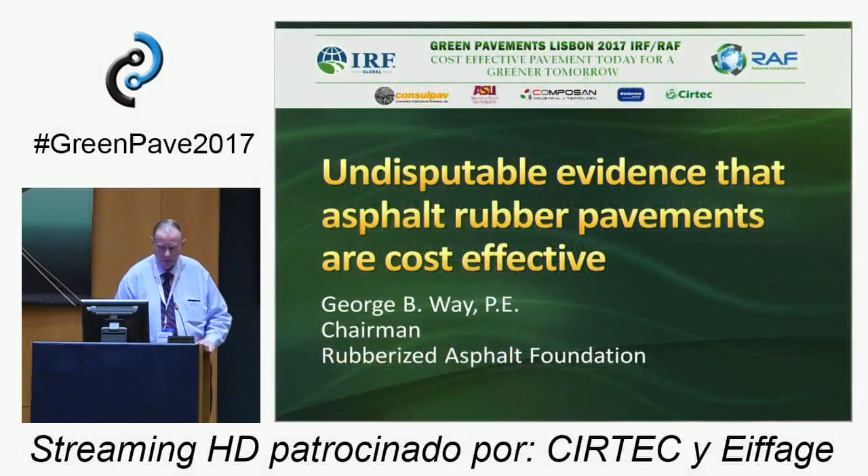This is the title that my good friend and partner George came up with. I'm not really too sure about 'undisputable' - I've actually never used that word in my entire life, but that's a good word, George. Sounds terrific, so quite a challenge in some ways.

Well, why do we even have paved roads? We talked about this a little bit earlier. Let's go back to basics here. We saw some roads before in one of the earlier slides.

Anyway, that's what we're trying to avoid with good roadways. And nowadays we've done such a good job. There was a movie that says, if you build it, they will come. I don't know if any of you ever saw it - it was about baseball. So we built it, and we built it all around the world, and the cars have come.

I've been to Riyadh, Saudi Arabia a few times the last few years. If you get outside of Riyadh, it really reminds you of Mars, actually - it looks a little bit like Mars, desolate. But in Riyadh, which is far from the coast, there's a lot of cars, and they're usually backed up like this. So one way or another, if you build a highway, build the buildings, the infrastructure, the cars will come.

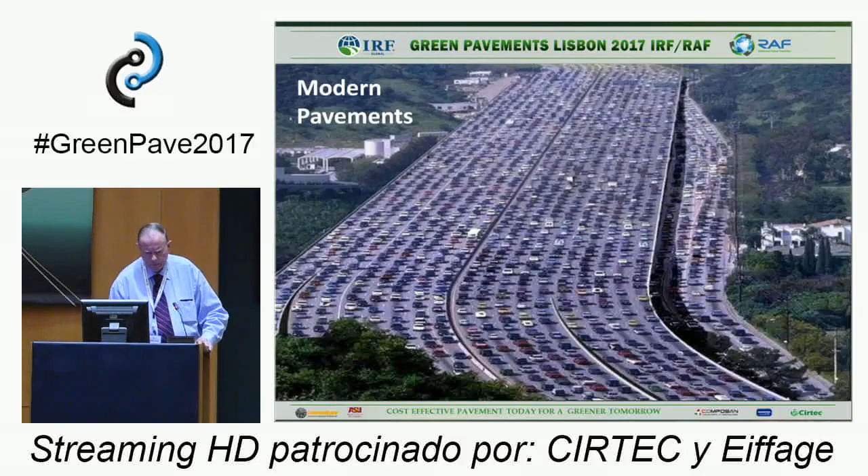And now, besides the problem we had before, which was getting out of the mud, now we also have the problem of maintaining and preserving our investment, which is a gigantic investment in roadways. So where does asphalt rubber or rubberized asphalt fit into this?

And you've already heard some wonderful presentations before me. I think Camille gave a fabulous presentation on this, and George, I think he does need psychiatric care, but we won't get into that at this point in time. We will talk about that later tonight when we've had a few more drinks, for that matter, and we'll discuss that.

But the thing about rubber and asphalt is it's turned out to be many things. I'm going to talk about these in general to kind of build a case for why it is such an undisputably great product. As George said, when it was first developed, it was patented and it was a very expensive product. All the patents are gone today, and it's reasonably inexpensive.

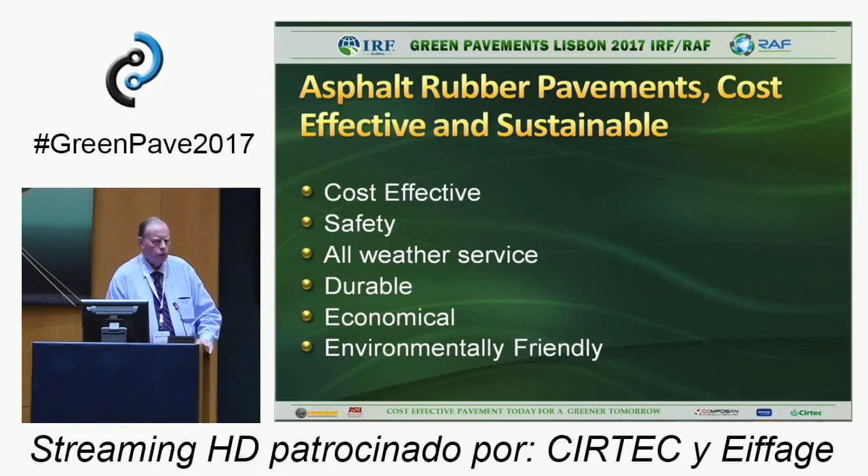It develops roadways that are safe. Of course we want safe roads, we want all-weather service - we want to make sure we're not driving through mud puddles or potholes. Durable, something that lasts for a long time. Economical, which is sort of like cost-effective, and environmentally friendly. Environmentally friendly is kind of a new thing - that's new in the sense that the man who invented it, going back years before, really didn't have that in mind at the time.

A tire is by itself a great thing. We've seen many presentations here about the future, what kind of highways are coming. As I envision the future, it seems like there still will be tires. People are still going to be driving on tires, whether in a solar car, one that runs on batteries, or whatever—it's still going to have rubber tires probably. There will be trucks and airplanes with rubber tires too. So there's still going to be used tires. They'll need to be recycled. We'll have to do something with them.

That won't change. So what about the recycled tire rubber itself? Well, it can do many things, and I've listed quite a few of them here, some of the good things. You've heard about these before. I'm not going to read each one, but you'll see some examples.

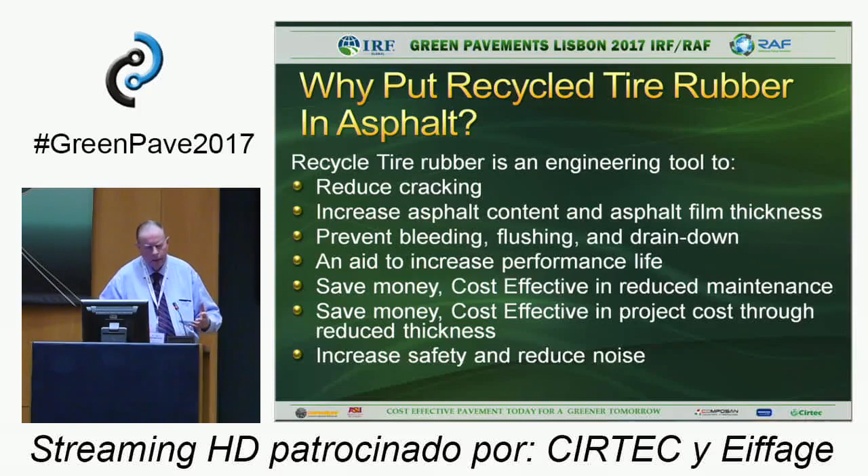Traditionally, asphalt rubber started out to be roughly 80% asphalt binder or bitumen and 20% recycled tire rubber. The first version actually didn't use crumb rubber, interestingly enough—they used rubber buffings off of a tire. Back in the days when they recapped tires, they peeled the rubber off, winding up with long shards. That's what they used in the beginning, so it was a little more difficult. Later on, they went to crumb rubber, and that's pretty much what everybody uses today. There are different ways of expressing it, whether by total weight or by weight of the binder, so you have to keep that in mind for the percentage, but it's up around 20% recycled tire rubber.

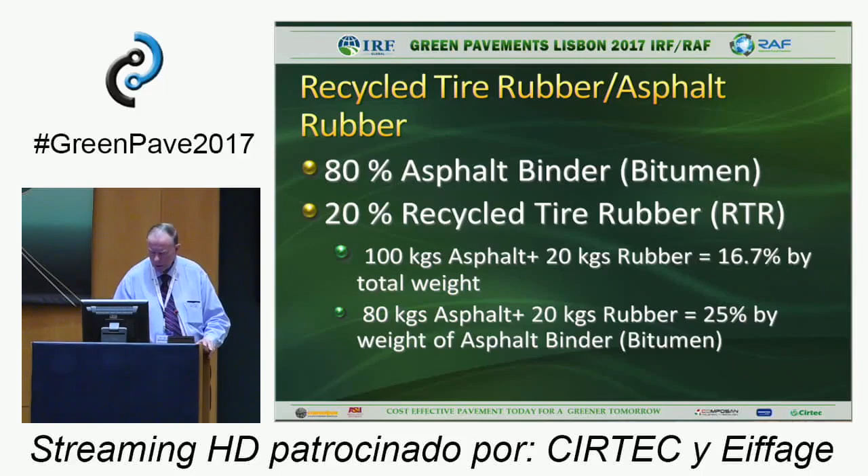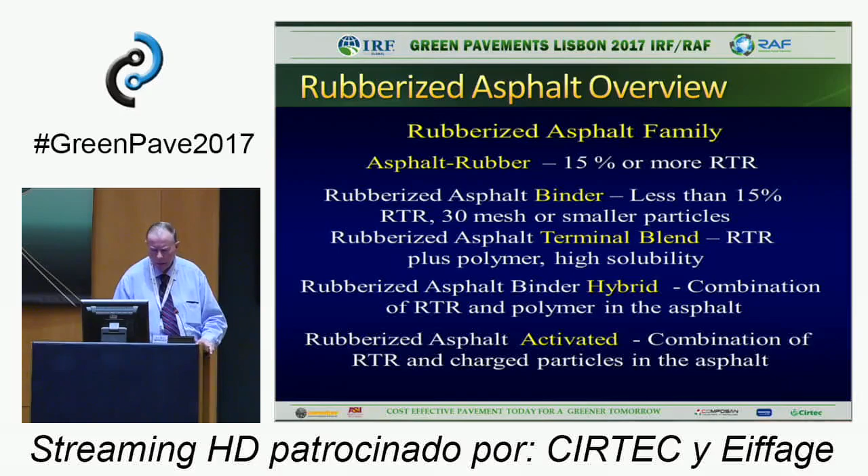Over the years that's changed. There's a lot of other products around today besides the 15% or more, which is the traditional asphalt rubber. You have amounts less than 15%, maybe 10 or 11, which work fairly well, with a smaller grind of rubber. You have it mixed with polymer, some small amount like SBS, which is kind of a hybrid. You have terminal blend, where the rubber is reduced and digested, and then polymer is added. And then you have activated rubber, which George spoke about—that's what we'll see a demonstration of this afternoon, right George? So you'll explain that in more detail later. Lots of different forms of application.

Just a few general remarks about integrating it into specifications. We heard that from our earlier speaker—he thinks it's one of the drawbacks, and that is somewhat of a drawback. Consider the fact that the AASHTO road test, which traditionally in the United States was the Bible for designing highways, didn't really have polymer or rubber, just neat asphalt. So how does that fit in there? Well, it didn't. It wasn't at the road test.

What about the empirical mechanistic design, which I was on that panel for? Camille was actually working on the research component at Arizona State University with Dr. Matt Witczak. It doesn't really have a place in there for asphalt rubber per se. Arizona State has done some more work with that, and there are ways they could maneuver it in, but it was not part of that model. So integrating it into the testing mode or even the specification mode does present some problems, because historically it wasn't in there when they developed those models or specifications.

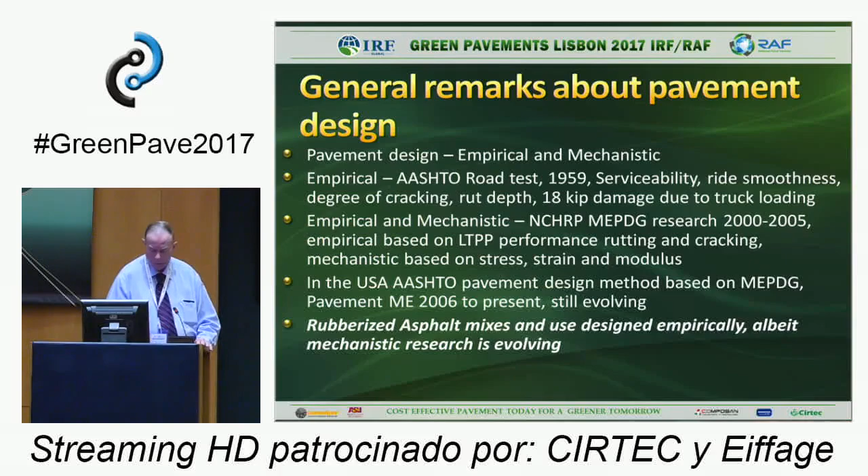I know our next speaker is going to be talking a lot about modeling, and he'll probably have many things to say about how I'm wrong about that. But that's okay—I've only been an engineer for almost 50 years, and I've seen some interesting things happen in that time that there were no models to fit. There weren't even any models, but we did them anyway. So that's what I'm trying to point out: this convergence of wanting to force something into a model that really needs its own model, its own place, maybe its own set of special tests or whatever.

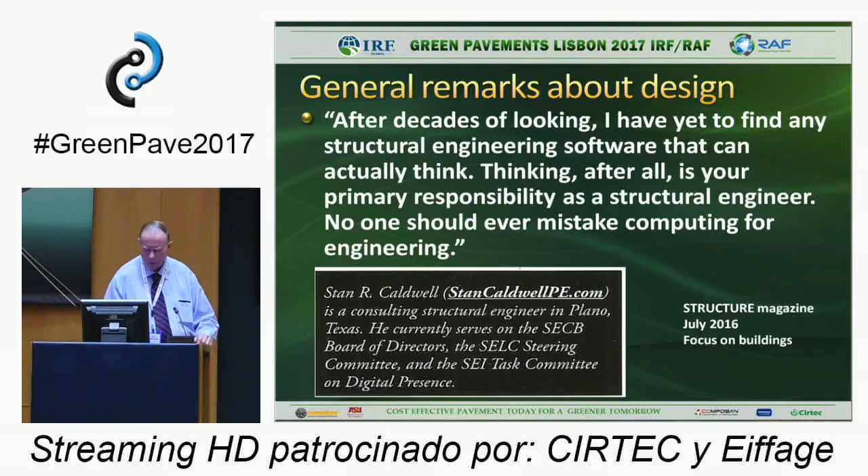Safety aspects, we don't want to build anything that's dangerous. We want good skid resistance, want it to resist rutting and potholing. We want it to have a good ride, although that's not necessarily always a safety issue. We'd prefer it not to be cracked. A cracked roadway by itself is not necessarily an unsafe roadway.

However, when the maintenance crew goes out there to fill the cracks and puts out signs saying move over to the other lane, that could potentially be a hazardous zone. All construction zones could be hazardous. So the less maintenance and upkeep we have to do on the road due to cracking, rutting, potholing, skid resistance, the better for all of us. We'll all be safer because we don't want to be interrupted and at the last second have to make a decision to move over, slow down, or stop.

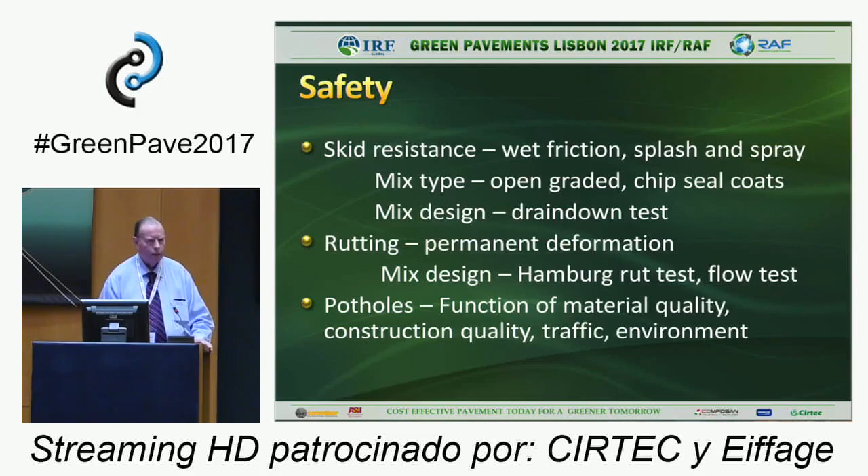You know, people do text while they're driving. Right over there, he loves to text while he's driving. He's not the only one, though.

Friction, Camille already pointed this out. We've investigated this for a long time. Open graded with rubber had great results. Now people will say, I've been in meetings where people say, but we can build open graded, we don't need the rubber. True.

California invented the open graded friction course. It was called a plant mix seal coat because basically all they did was take chips from a seal coat operation, run it through a hot plant, coat it with asphalt, and pave it with a paver, so now you had some leveling control. That was great. The only problem was it didn't last very long because it has about 20% air voids or more, and a very thin film thickness of asphalt, so it wasn't very durable.

So yes, you can build it. Many states did that. The Federal Highway Administration promoted it in the 70s. Practically every state gave up on it because with snow and ice it just deteriorated so rapidly that it wouldn't stand up under traffic.

Arizona used open graded for a long time. We almost did away with it because of those reasons. Then we switched over to using asphalt rubber with it. That gave us greater film thickness, meaning the material could stand up longer. It also had more elasticity because of the rubber, and began to have much more durable surfaces, like where Camille and I live in Scottsdale, Arizona.

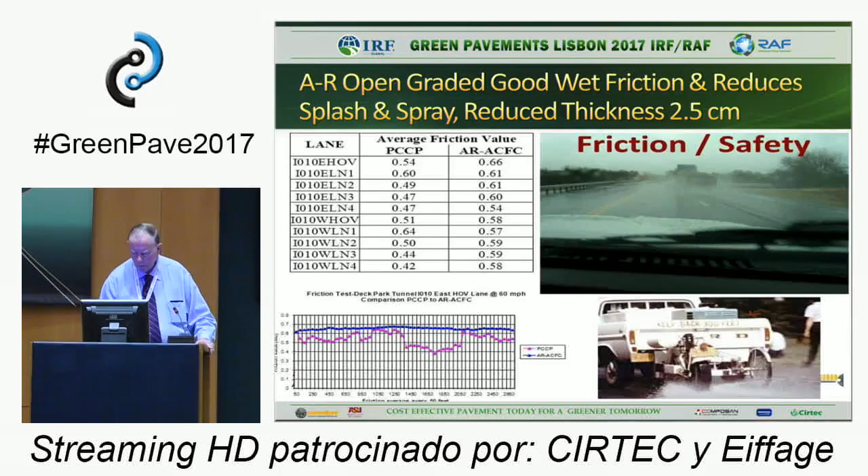Camille already showed a slide like this - again, improvement of visibility because of the open graded nature. You saw this slide before, and there were also some accident statistics quoted by Texas showing that because of this, they could reduce accidents and fatalities.

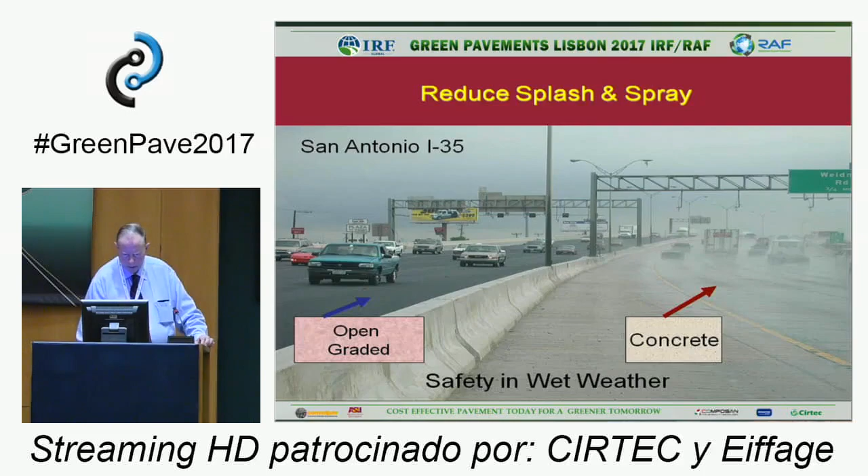We also took skid readings; in Arizona we had a mu meter, which measures a skid number. It's not exactly a direct friction number, but as long as you're above about 45 on these wet tests, your pavement is in good shape for skid resistance. You can see the ones with asphalt rubber maintained a very good mu meter number, good skid resistance, wet. So that was a good thing.

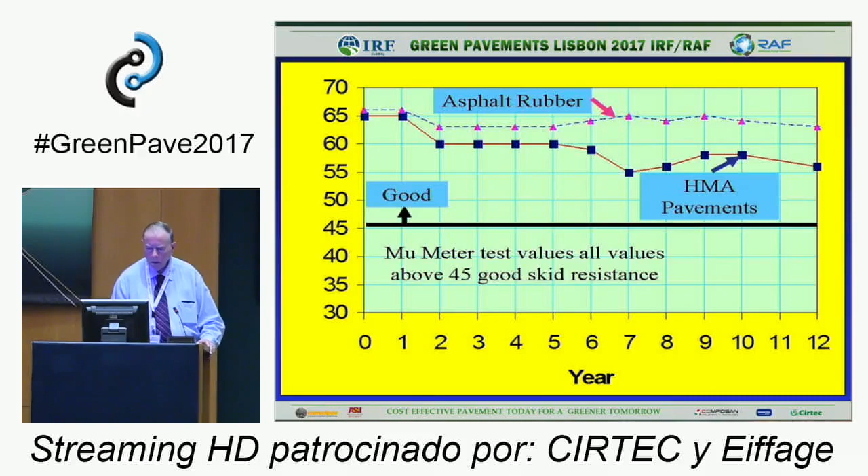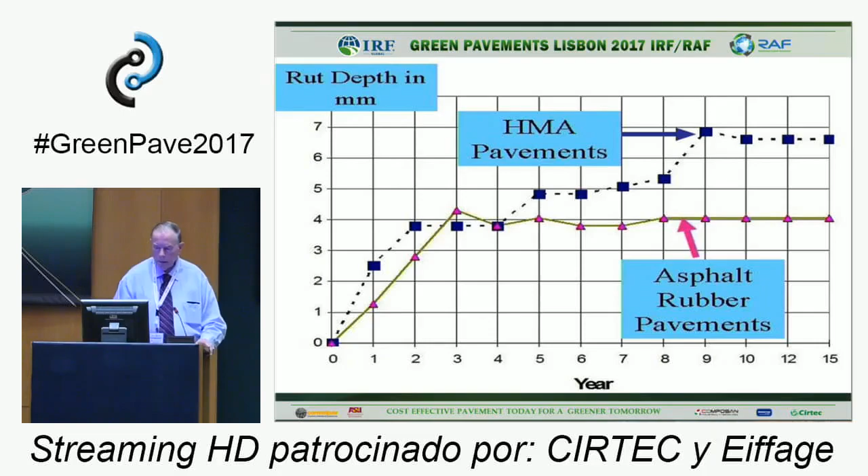Also rutting resistance - you can see here asphalt rubber, we've kept track of it for a number of years. The logic is that pavements that rut also tend to crack sometime around 4 or 5 years in. When they crack, more water gets into the base and you begin to get rutting. With asphalt rubber, we don't get the cracks, so that process doesn't happen.

Potholing is something we want to always resist, and I'm not going to say asphalt rubber is totally resistant to this, but it certainly has stood up very well. The project built in Jakarta, Indonesia, where they have a lot of potholing, is a good example—so far it's performed beautifully. We don't really have much potholing in Arizona, probably because we don't have much rain, but it's rare that we see much of it. Still, we want to avoid that.

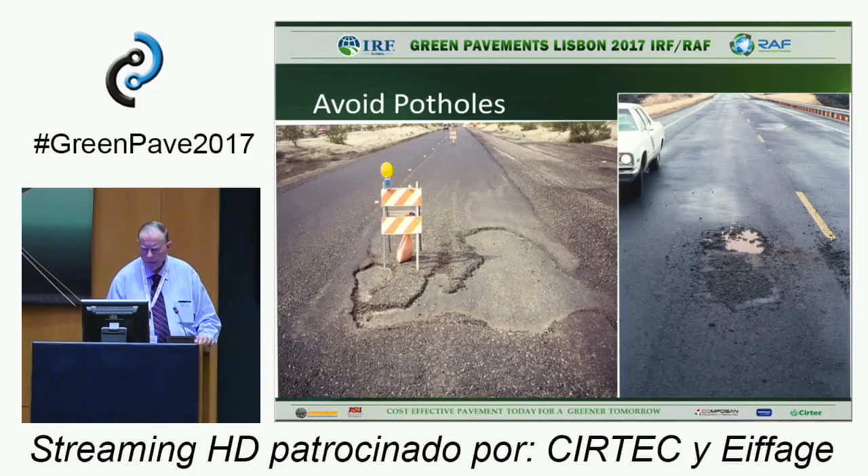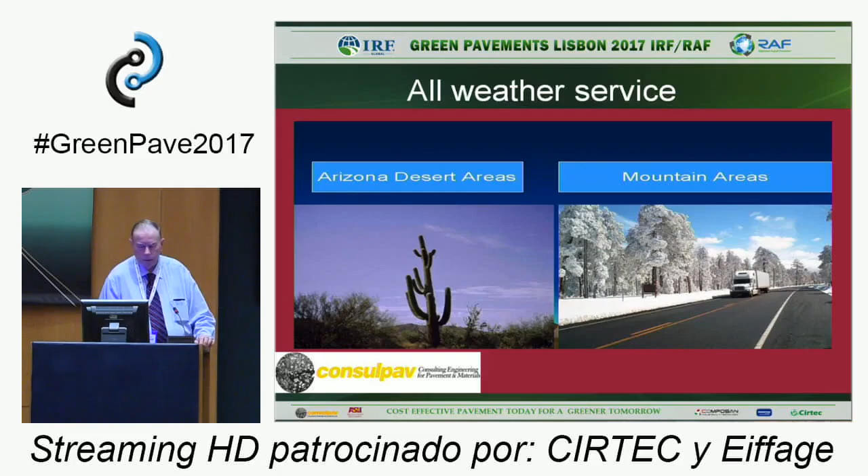We've used this material in Arizona in hot and cold climates, as has California. They have some passes going to Reno, Nevada, up in the high Sierras that get several feet of snow every year, and they've had very good success with it in cold weather.

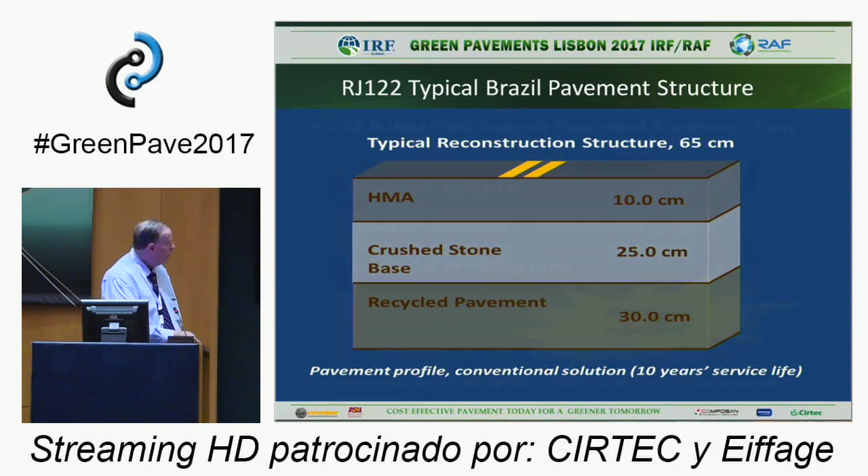This is what was done instead: some leveling. The existing pavement was horrible. They did a little leveling, then the gap graded, then the open graded layer. It's performing beautifully, and much less expensive—I think Angelo said 30%, I think George had this at 40%. I'm not exactly sure how they computed that number, but it was much, much less expensive.

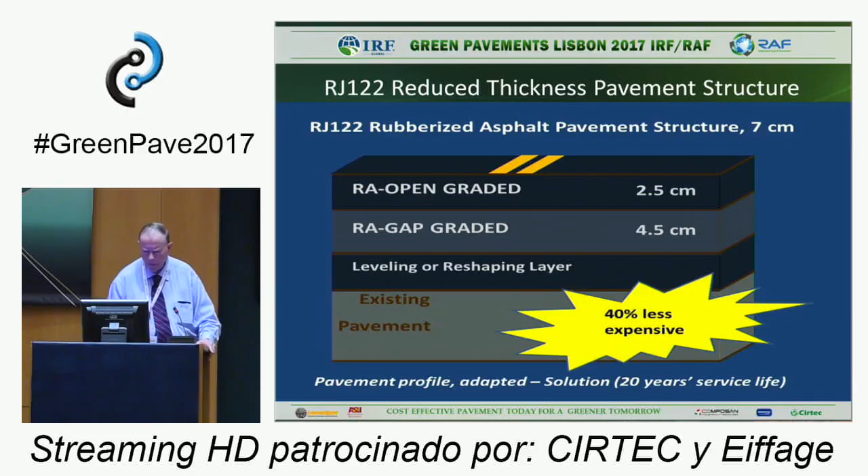Then the driver would drive ahead about 100 yards and slam on the brakes so the stuff would slosh around a little bit—that was the mixing they were doing. They had no auger drive or anything like that inside. Then he'd back up and do the same thing, two or three times, until they said, that's it, it's ready.

Then they would try to spray it, and if everything worked perfectly, it would spray. But many times it did not work perfectly, and in fact they actually burned up a boot truck doing this. Their theory was, let's really get it hot and that'll be good—and they did, and it burned up the truck.

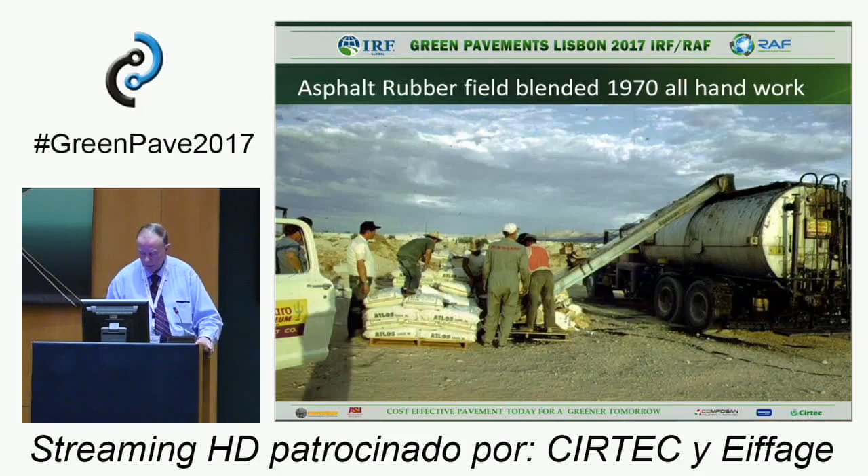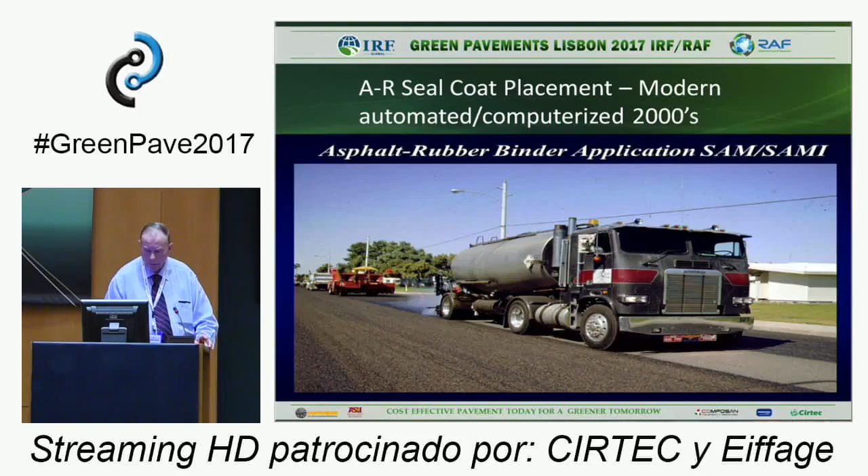Modern chip spreaders supply about twice the normal binder to the surface of the road, which means you're getting a greater film thickness, which is a good thing. So the original concept here was greater film thickness with chips.

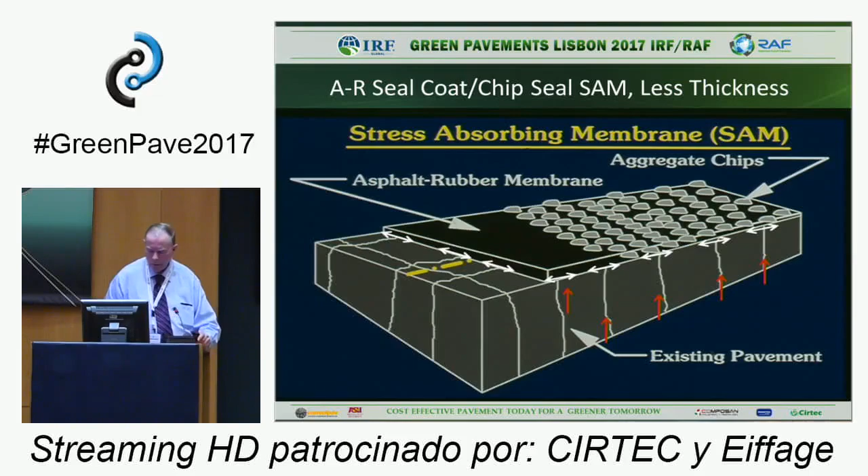This was called a SAM, stress-absorbing membrane. This material was about twice the normal amount you'd have for a normal chip seal. Because it's high viscosity, it doesn't run off the road, so you can get a lot of binder right on top of the pavement, and it's very extremely sticky material.

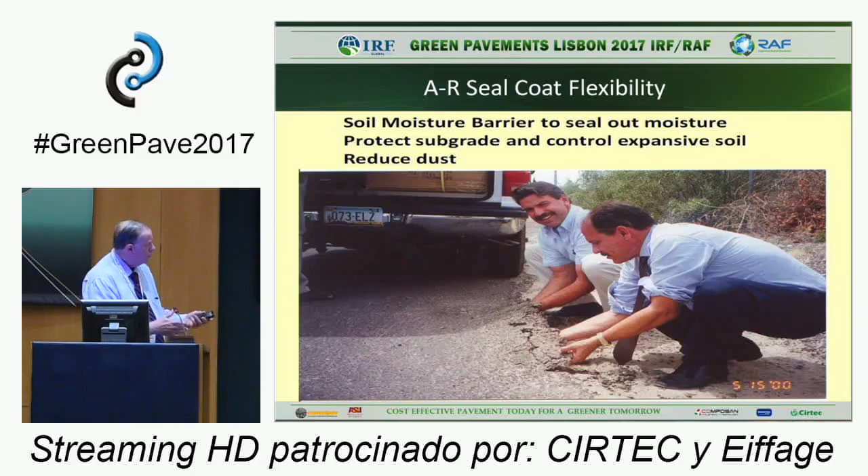It's been used also on light traffic roads, put right on top of the soil just to cut down the dust, but you can also drive over it. These are primarily in desert areas where we have a lot of dust.

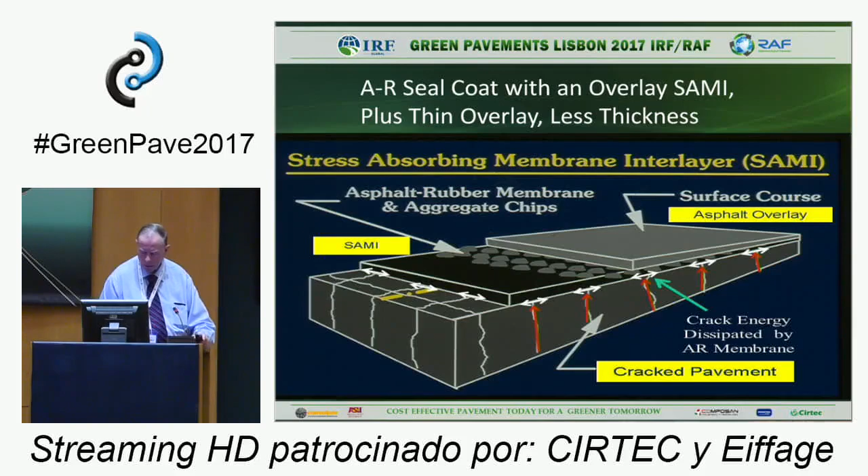Later we caught on to the idea that this seal coat doesn't give any leveling, so let's put an overlay. And then later the overlay actually had rubber in it, gap graded as well. So there was kind of an evolution going on here.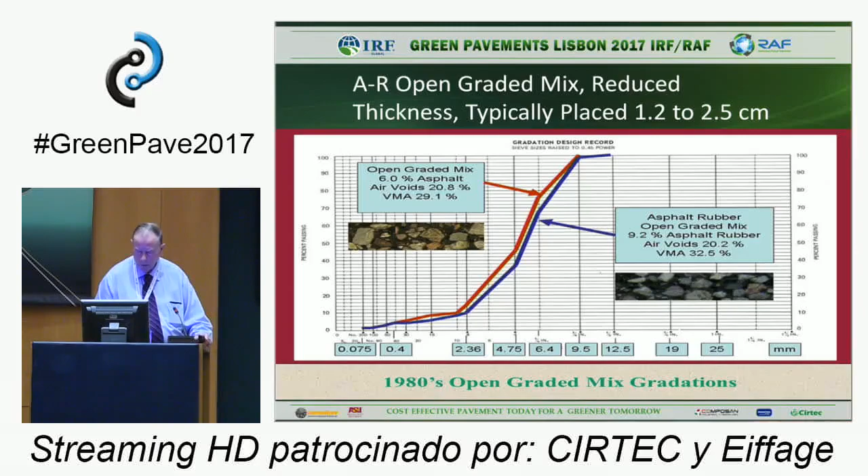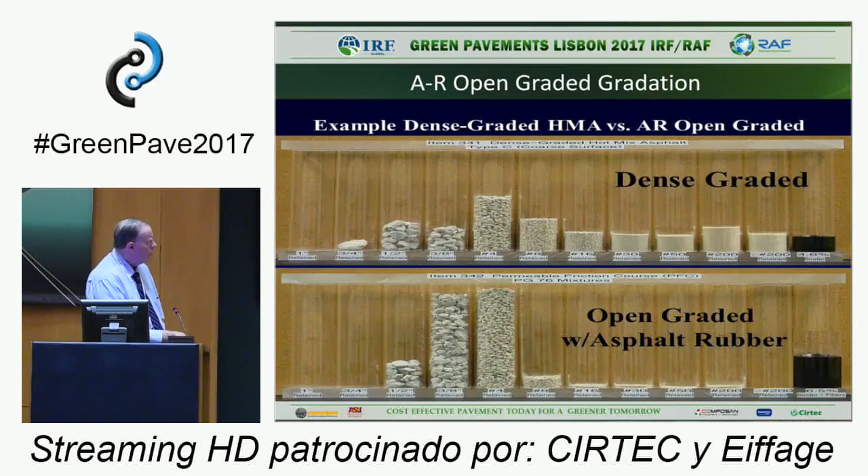Just to show you the difference in gradations, this is what you might normally see. A dense graded shows all these different sizes of aggregate. The open graded is pretty much one size with very little fines. It's similar in some ways to an SMA, except SMAs have a lot more 200s than we use.

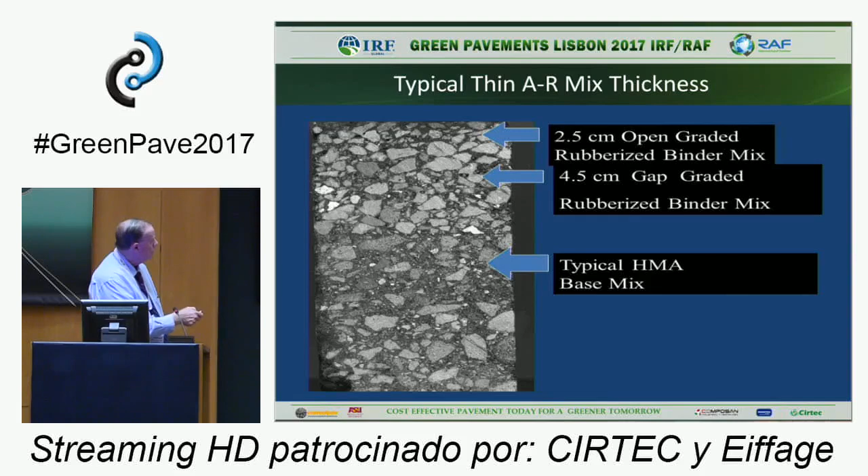So just an example of a cutaway: this is a typical dense grade in Arizona, notice large rock and a lot of sand. Go to gap graded, a lot of rock, less sand, more rock-to-rock contact, less rutting. Open graded is all pretty much just one size aggregate with a lot of rock contact.

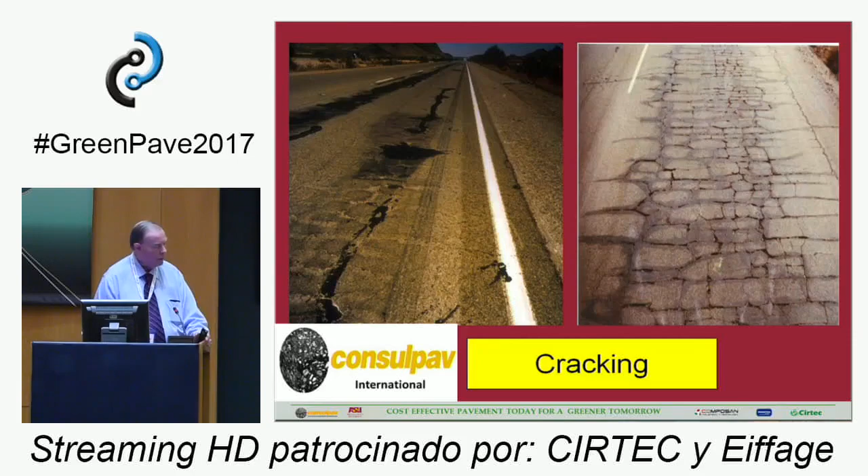Cracking, we've had our share of it in Arizona. In my day I've seen some pretty badly cracked roads in the old days, and we eventually developed a scale to give us a general idea where we were at. You can see it around 10 or 11 you're starting to get some fatigue, and by the time you pass that, it's bad. It's really bad.

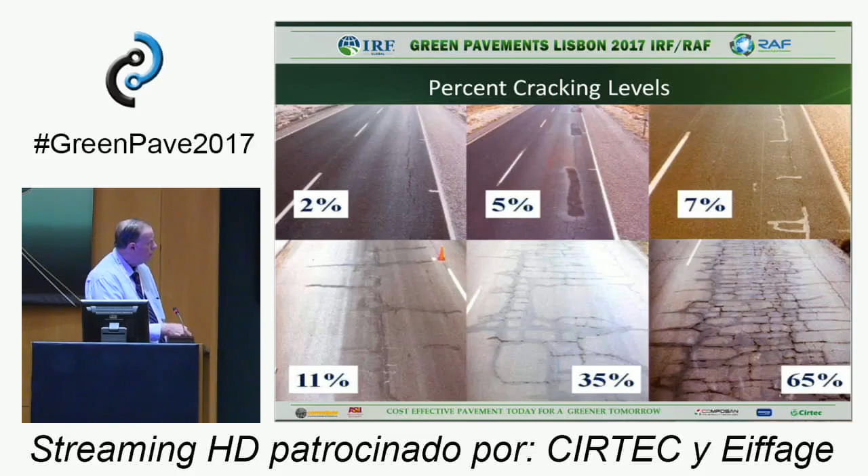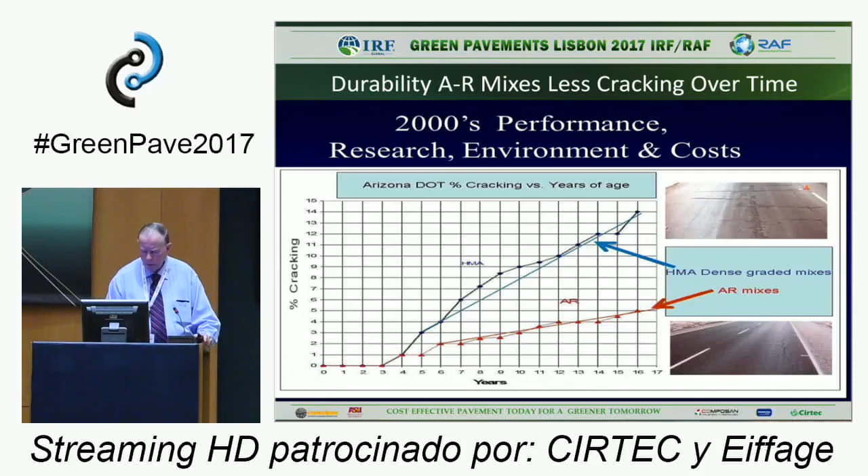Raveling, like I said before, open graded typically would ravel, but when you added the asphalt rubber, it would not. Just again, the example in Brazil.

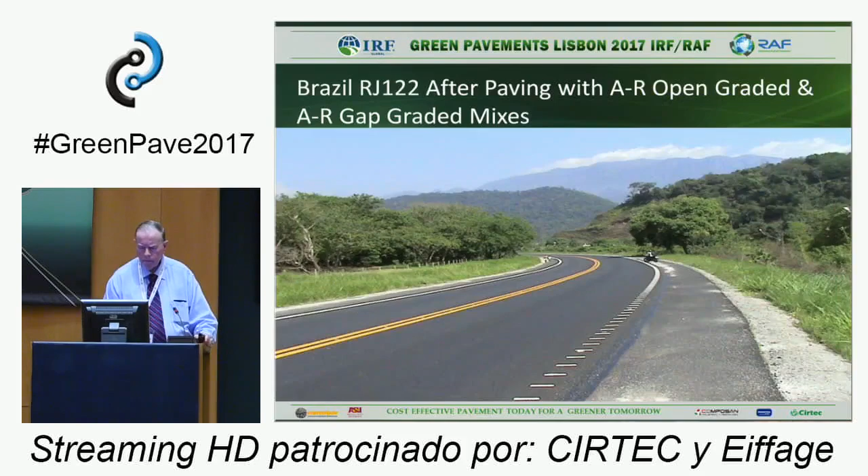But cost is an interesting thing. George talked about this a little while ago, and we just did some figures here in the last few months for a class that Camille was teaching.

Notwithstanding what George said before, I still think agencies like to save money. I may be wrong, but I know when I worked at the Arizona DOT for 35 years, we liked to save money, and we thought we were doing an economical job. But you bring some good points, and I'm sure we'll discuss them more as the days go by.

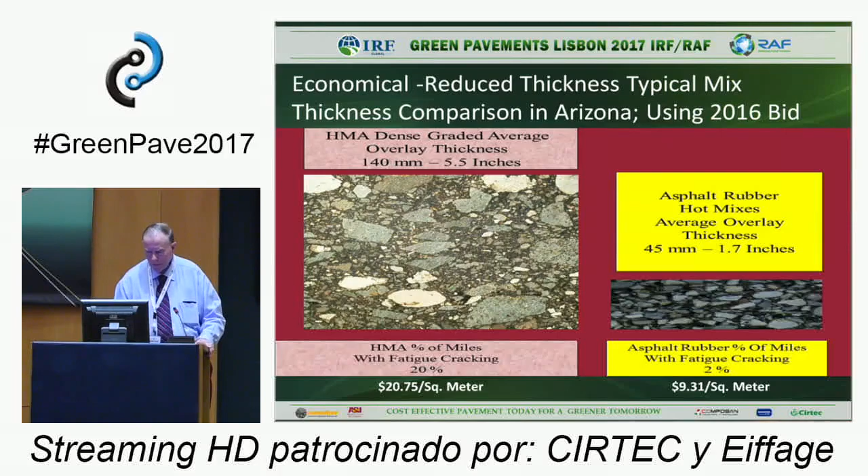This is an interesting study, not done by me or George. This is done by California, actually the city of Rancho Cordova. They have been using asphalt rubber for a long time in California, a very, very long time.

These are on city streets, a city street situation. They use a PCI, which is a kind of an overall rating of the quality of the roadway in terms of cracking and other distresses.

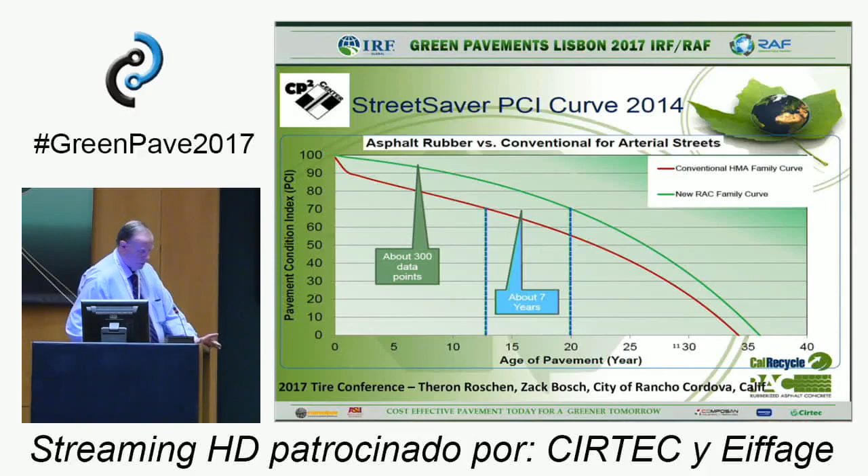And this is representing many, many points. You can see here that the conventional has this line, and the line for when you use the rubber is pushed out. So you're gaining about 7 more years of life. In essence, it means they don't have to do maintenance or seal coat as frequently as they would with traditional HMA type work. So they are saving money in their minds, and this was a very good study, I might add.

Again, just an example of some of the economics, maintenance cost savings. There's also a safety component. Regrettably, in my state, we've had maintenance people killed by traffic, running off the road or running into them. I've had them involved in accidents. Construction zones and maintenance zones are always difficult and dangerous. So this is just one type of cost, just a materials cost. But there's also a safety issue cost as well, to human life and limb.

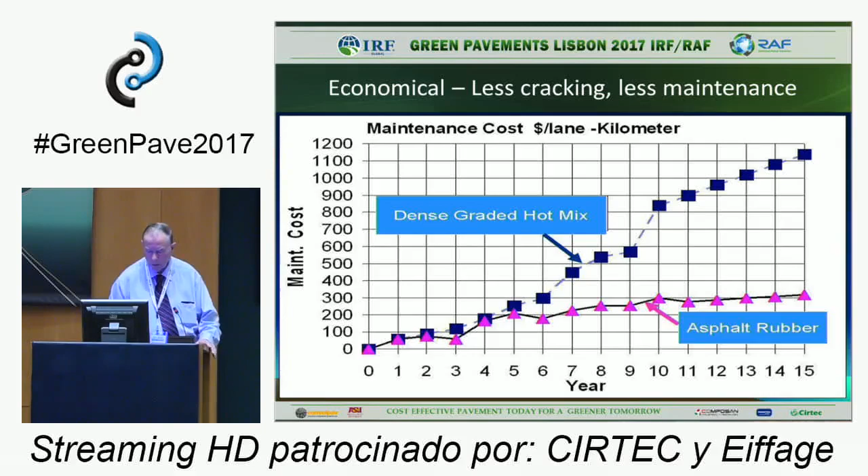Environmentally friendly, we've heard, I think Kamil did an excellent job on this. We recycle the tires, and there are many things that go with that. Tire fires. Tires are a great place to grow mosquitoes. If you want to grow some mosquitoes in your backyard, get some tires, throw them out there, put some water in them, and they'll be happy mosquitoes, breeding like crazy. And you can also reduce noise. These are just some things more associated with the environment.

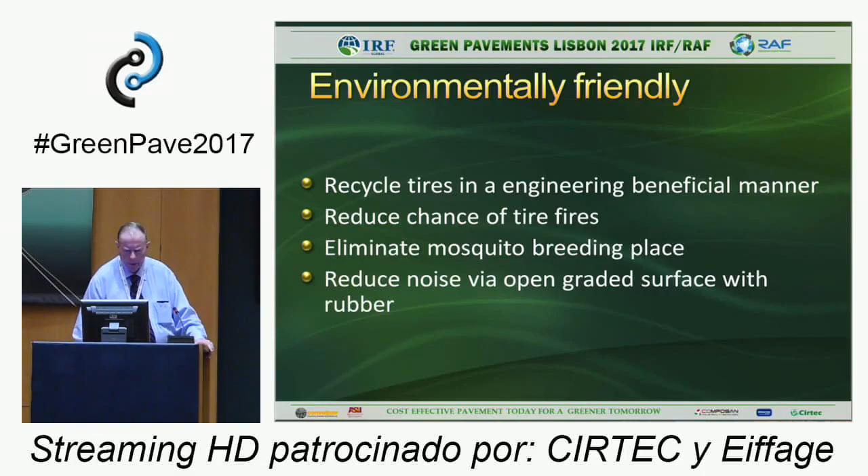This was a bad fire they had in California many years ago, and it took a long time to put itself out. They can't actually put out a tire fire, it just has to burn itself out. So all of this CO2 that George loves just went up into the upper atmosphere, and it's bad. This went on for months and months. But then the oil residue created by this soaks into the soil, which costs millions and millions of dollars to figure out what to do with, because you don't want it to eventually go into the water table.

So you got a problem going this way, and a problem going that way, and it could have all been avoided if they had simply done what George said: just put the recycled tire rubber in the roadway, right George? Correct, we wouldn't have this problem. Simple solution. And then, like I say, it's a breeding ground for mosquitoes, pests, other kinds of vermin.

Noise, this was a big study that Arizona DOT and Caltrans, California DOT did. They hired an expert in the area of noise, a retired General Motors man. This man's job with General Motors was to make cars quieter. He would do all kinds of testing for them. He told me it was kind of in his line of work with General Motors, building cars and trucks and vans. They had a simple solution to fix squeaky parts.

They'd get some rubber and shove it where the squeak is. In other words, they used the rubber as a dampener. So when he was asked, what do you know about tires? He said, well, I do the inside of cars, but I'll give that some thought. And he invented some equipment, to actually measure this noise right next to the tire.

And what happened here, we found that our open graded was the quietest. That's a section in Arizona on Interstate 10. The noisiest was some concrete. This was an interesting section. We've been building concrete for many years in Arizona, very noisy concrete. The Federal Highway Administration came out with a big study and said, well, you're just not doing the right kind of tining. Follow this tining equation developed in Wisconsin, it'll be quieter. So we built it, that's that one right there. That was the noisiest section we ever built.

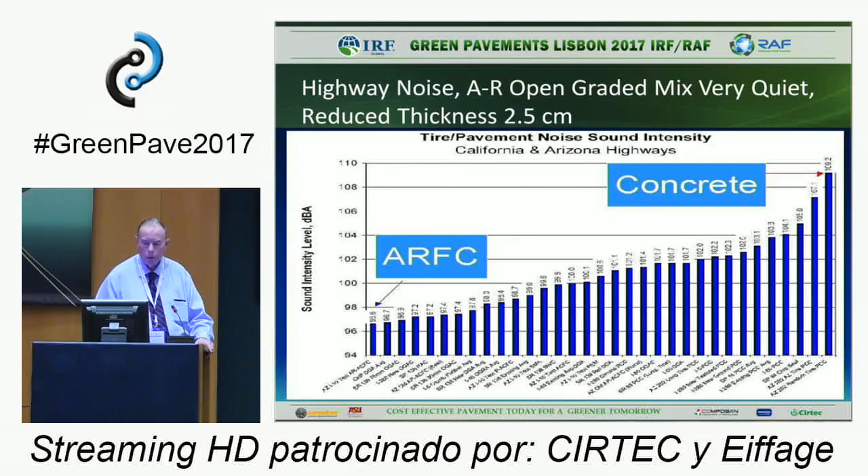However, it does get people's attention. Noise gets everyone's attention. This was a study that Kamil reported on, and I think he did a great job of it. Arizona State worked with other universities on this, some in Europe, I think, and the data came from Europe. It pretty much showed what he said before. This is a great way to lower the amount of CO2, and also you're saving energy as well.

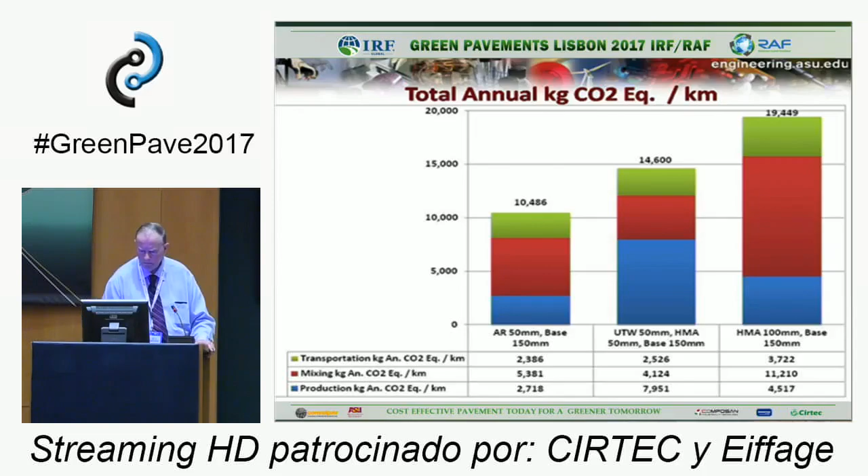The other things in here, we've seen all of these, for that matter: cost-effective, sustainable, environmentally friendly, certainly sustainable. Obviously you can recycle. The rubber effectively doesn't deteriorate in a sense, so it's there, and you can recycle the road, and no harm is done.

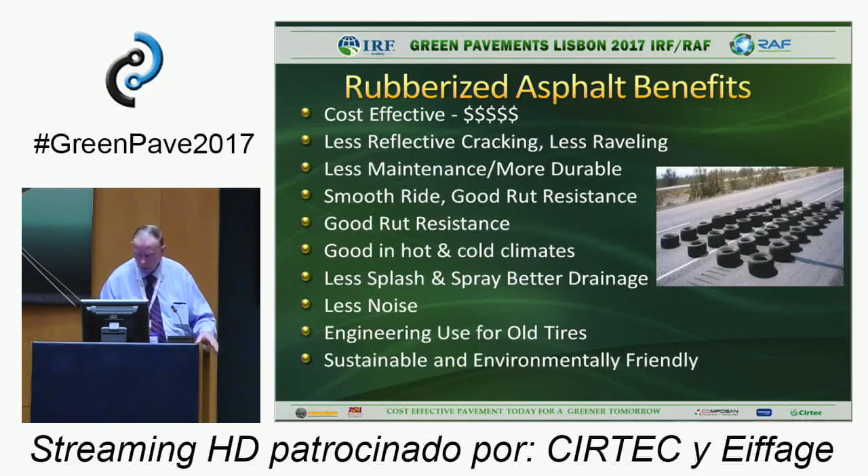We have another conference coming up in South Africa next year, I think in September. So you're all invited. Come by, you'll see some wonderful papers on this subject, and you'll see some lions. We're setting aside some lions for Kamil because he wants to pet them. He wants a little petting zoo where he can pet the lions, so we're going to do that as well.

If you have any questions, I would be happy to answer them, and if you don't have them right now, you can ask a little later or whatever.